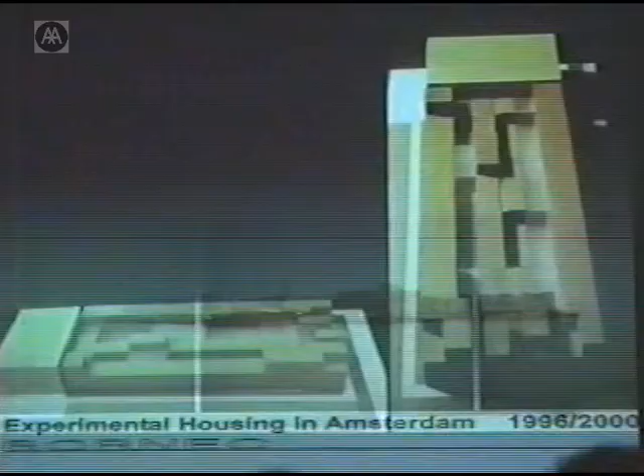Maybe you know, it's a kind of massive piece with holes, with certain rules, connections to it. This is a housing project with luxury housing, with halls, courts, private courts, and so on. It established a kind of strategy of limits, like making a border, a north, a connection moment, an ending moment, and a center. So it's a piece that I wanted to have a certain unity, formal unity, in relationship to having a starting, an ending, and a center also, and not just a kind of addition of parts.

All the houses have the landscape repeating into the roof, and the material is also connected to that - this kind of material that is between solid and lighter and light. The wood, for instance, was also decided in relationship to the ships, in some kind of contextual and even strategical decisions, because the client was a builder, a wood builder, a very good one.

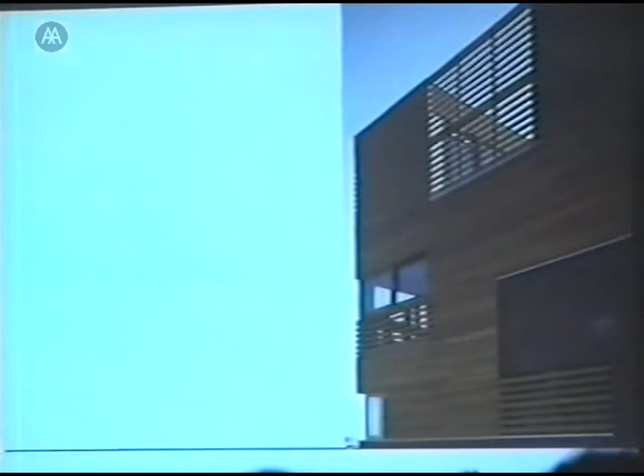And even the houses were also defined in this kind of dialogue in between light, air, and space. For instance, this is one house with connections to the outside, connected to the windows, with this kind of jalousies, this half open, half closed facade, a kind of winter garden, and also light coming from above.

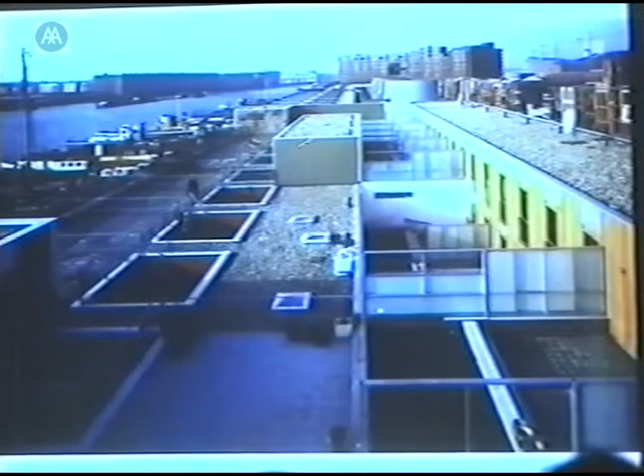Because at the end, the whole cover was like a village in a way. All the houses had a kind of garden, a green garden here. This is the north houses, glass garden. From here you have light underneath, and the whole area is transformed into a kind of domestic landscape when you arrive onto the roof.

So it's a kind of metaphor, this connection to the landscape and to the cosmic forces, that also acts as a practical fact for the inhabitants of the different houses, who have a lot of private outside space. Another house is also dramatically dealing with the cosmic forces of the landscape.

This is in a place with a lot of wind, dramatic hurricanes from the north, and very warm in the summertime. In the end it has not been built, even though it's in Mallorca, because of these reasons. It's in an open bay, so the weather is very intense and dramatic. The house is trying to deal with this kind of weather and natural, let's say cosmic, forces.

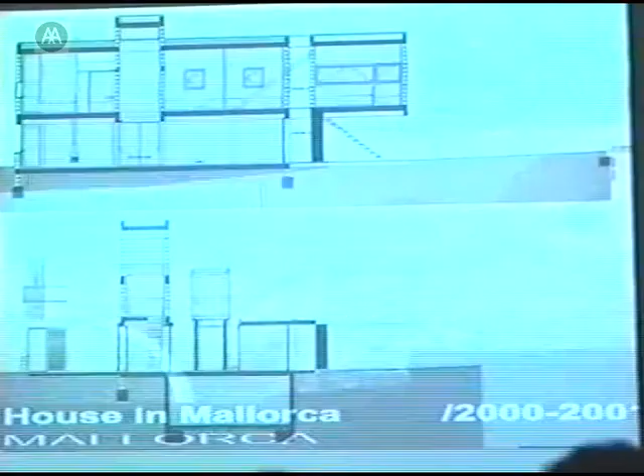The whole plan—there are some sections I'm not going to explain—but the whole idea of the house is, for instance, like a big wall protecting from the wind, from the north wind, in the rear a kind of small and calmer court. This is the section of the living room space, which has this kind of chimney section in order to have all the warm air arriving here, producing natural ventilation without any mechanical things.

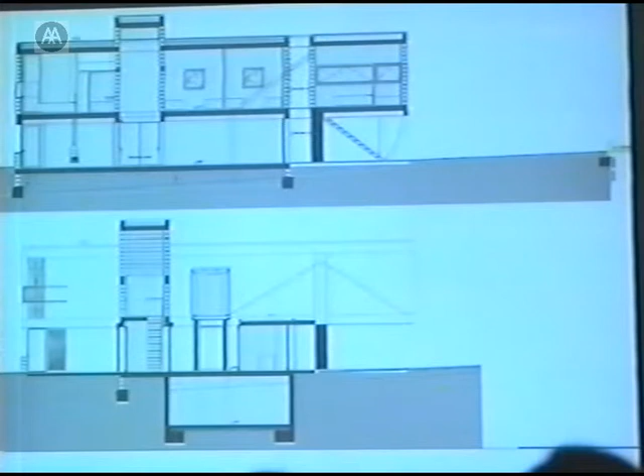This is a small court trying to avoid having direct sun into the house. This is a big cantilever, also for the same reason. So, wind and sun, but also some kind of formal presence, because it's a rocky mountain, the whole thing.

And the building is a kind of geometrical, crystalline form in relationship to this. This is the blue area—the big wall connected to the big wind protection. So it's a higher element protecting the rest of the house from the wind.

The whole area is this kind of rocky mountain with almost no vegetation, and the house is a kind of cubic, crystalline, geometrical, inorganic reading of this geological presence, with some detailing that's domestic and very African, North African, in terms of connecting and having the possibility of light inside.

But the house is also, at the end, using this kind of landscape as a spectacle, because it's a domestic house, a kind of weekend house. So you are there, and the living area is absolutely transparent, like here. This is the south area, and the north on the other side, and the house moves from north to south in a fluent way, like here.

So this is a small court protected by the wall, and also open to the north side, the windy and sea side.

Some stupid things like we are doing now. This is another kind—this is our old object. This is a very new one, something produced last week or something like that.

We are designing furniture, we are designing for a bank in Spain. This is the fourth Spanish bank, the Banco de Sabadell, and we are designing furniture pieces connected to the bank, special things, funny things, special for special purposes. This is a table with wheels for the public areas, where people are arriving, and big chairs that we are also designing.

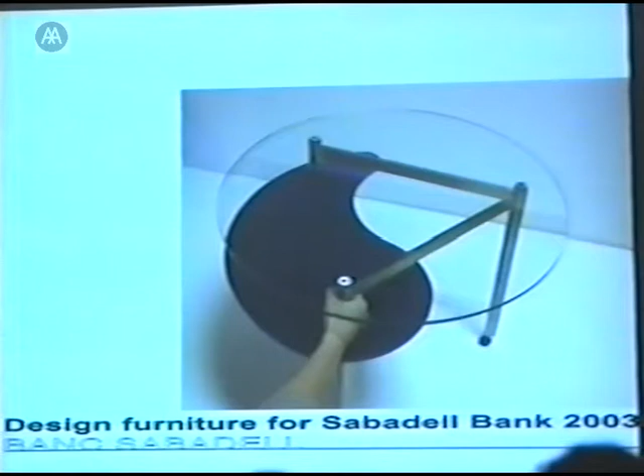And we are designing this kind of allegory between the yin and yang Chinese principle, the two levels—maybe it's easier to see. This is the yin and yang thing, and this also deals with the name of the bank, which is S, S of the Sabadell, the letter S, and it's also a kind of joke in relation to the entrance.

There's a kind of more festive and ironic presence object, among many others we are designing with other kinds of roles.

This is going to be just a project into this kind of series. Even this is only the design—already designed but no construction yet. It's starting the construction process, but not much yet. This is a project in Portugal, and now it's starting construction, but I'm going to explain it just as a project.

This is a project dealing with the topography of the site. We have to design the center, the urban space of the center of the town. The town is Castelo Branco, Portugal, nearby the border with Spain.

We designed the square, and also a small building with an auditorium for Maria João Pires. She's a fantastic piano player—I think the best Bach pianist now—and she's from this town. She has a house here, a foundation, and this building is going to be a kind of auditorium for the foundation, where she's going to play.

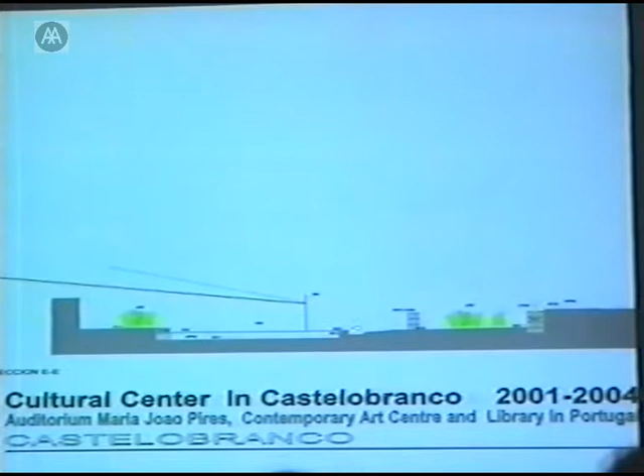The barracks are now out of use, and next to them my building for Maria João Pires is appearing. So it's a kind of transition—square, something in between, and forest.

This is the starting moment of this heavy action, the brutality of the architectural technique. This is the town, the limits, and the machines organizing the fantastic granite rocks. The whole thing is granite, like everywhere in Portugal, like this stone here.

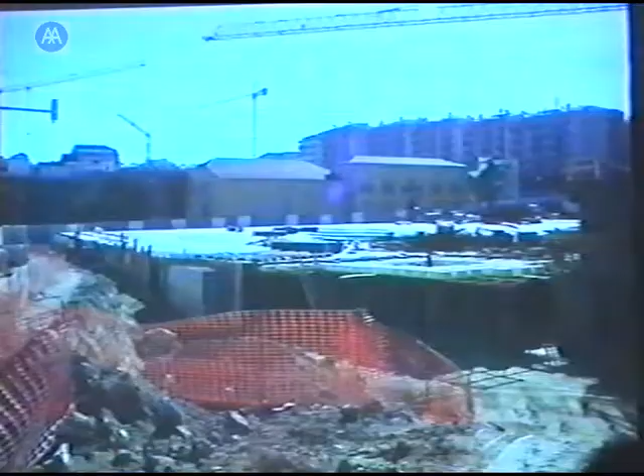This is a bit of the surface of the square. These are the barracks from the army. This is the place for the auditorium and the small museum—it's going to be here. The building, the project, is something like that.

It's absolutely elemental—just building the topography on one side, dealing with very primitive and simple facts. For instance, the way you put all the rainwater out of the square—the whole water of the whole topography goes to this one point.

Here a lake is going to appear. This lake will be bigger or smaller depending on the rain season. It's paved in a nice Portuguese way, with small pieces of granite in different colors.

This is going to be basically a green area, a green band here. And here there are some small elements—a restaurant, a tourist office, and a big canopy connected to the restaurant and some exits from the parking.

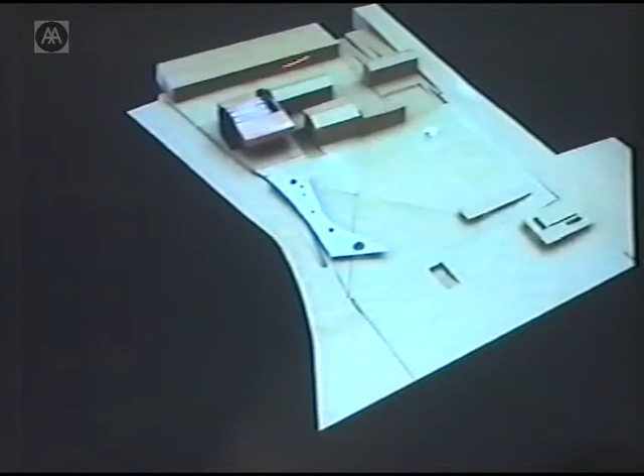It's a kind of, in my opinion, elementary but detailed urban space. Here the new building finishes the others, dealing with the ending and with the continuity of this space towards the other one, which is going to be the big forest—this part paved, that part natural, and in between our building is here.

So the building—this is some of the primitive ideas of the thing. This is the lake, the green band, and the primitive version of the building, which has no contact with the earth—just a continuity, showing the connection from one side to the other.

This is shown in a bit more detail, using these Portuguese materials in this drawing. The drawing shows the movements through the square, the normal flow through the space, marked by differences of color.

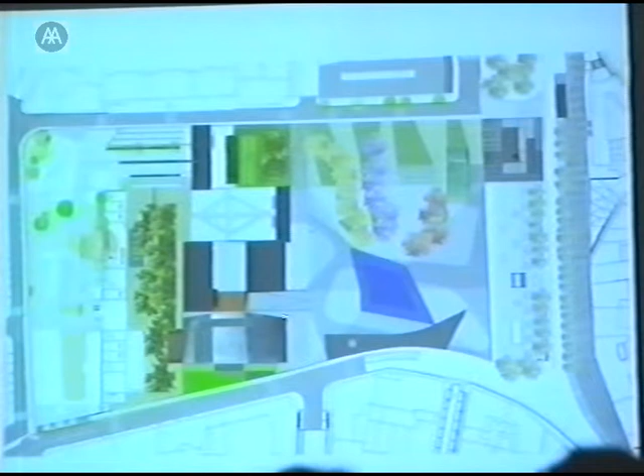The green, the lake, the canopy, and this building dealing on this side with the form of the space between the two blocks, creating a kind of reaction there. The whole building has a very small section, but I really like it because it creates a continuity of space.

So you have services underground. Here there is going to be a kind of patinoire - how do you say patinoire in English? This kind of... a skating area, it's a cold place, a very cold place. So it's a skating area here.

So this is the big facilities of the museum and the collective spaces. And here, to this plan, you have this kind of ramp and element like that - that's a small museum connected to the Contemporary Art Museum in Lisbon. It's a kind of showroom from this museum. And here is the small auditorium for Maria João Pires.

So the whole thing is a kind of continuity from here until there, as a space, and also as a roof. So the roof is continuing as a facade and continuing as a ceiling here. So it's a kind of continuous band of outside and inside, but also in terms of space. So some structural problems and dramas.

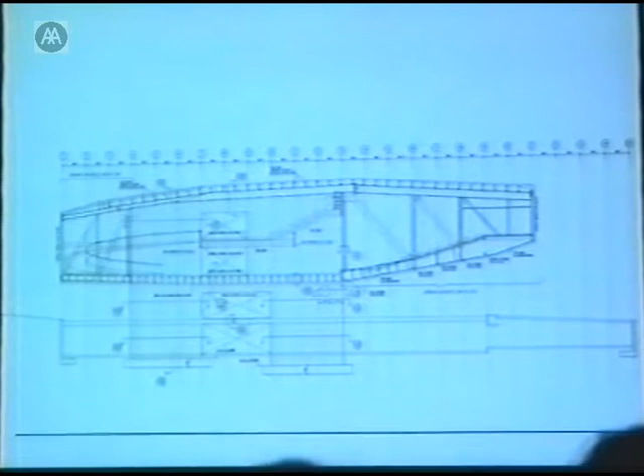So it's a big... so you see the plan. This is the ground floor, the minus one. So when you arrive from the square going down, it's a big, regular and clear plan, free span and flexible space with some holes in order to have light. This is the level of the street.

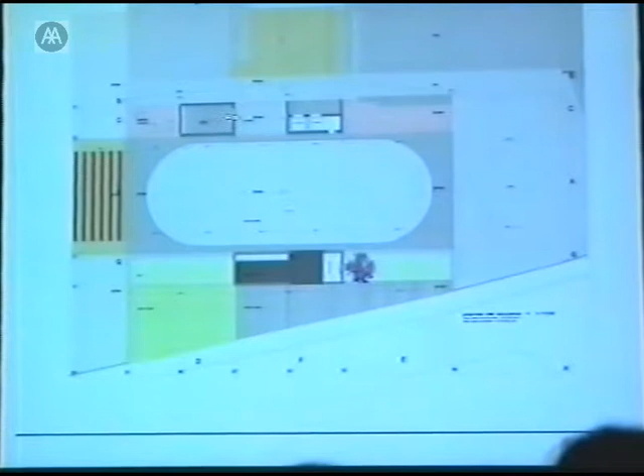This is the level of the patinoire, the skating area, with the vertical axis, the concrete staircase, the elevators and service elevators and so on. This is the floor with the ramp going up and the bottom of the auditorium. At the end, you arrive here - this is the foyer, you enter here, you went down.

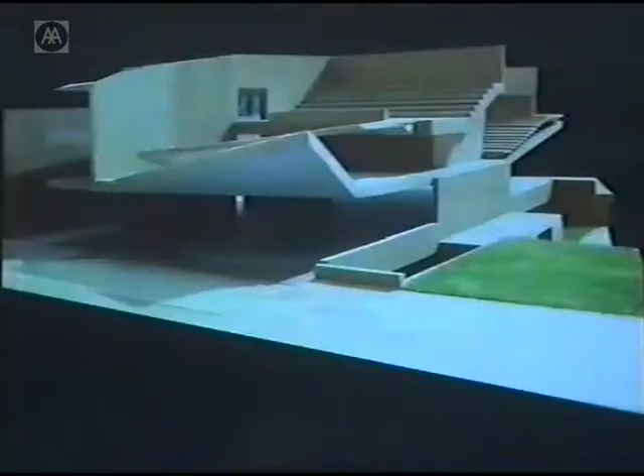So the whole thing is just moving. It's a project where the whole thing was moving - the floors, the ceilings, the roofs, and even the facades. And doing that, they organize the space like here. So this is a movement of the floor in relationship, a reaction to the ramp's presence. This is a kind of possibility.

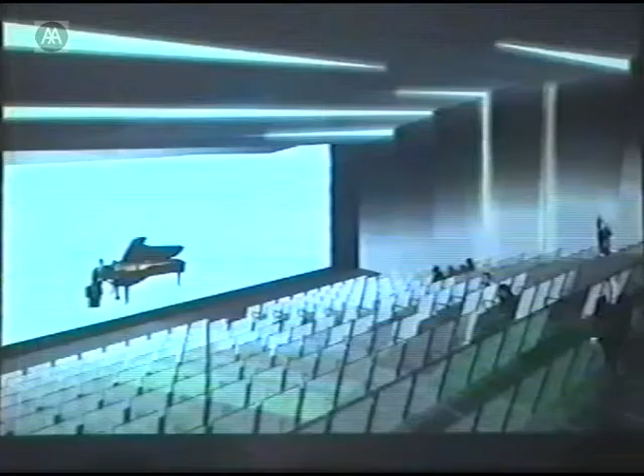The inside of the Maria João Pires auditorium. Maria João is very small, a very small woman, always dressed in black, and it's a very small auditorium - just for a piano and 3 or 4 more people. The whole thing is a very black scene, a black theater, but the scene is white.

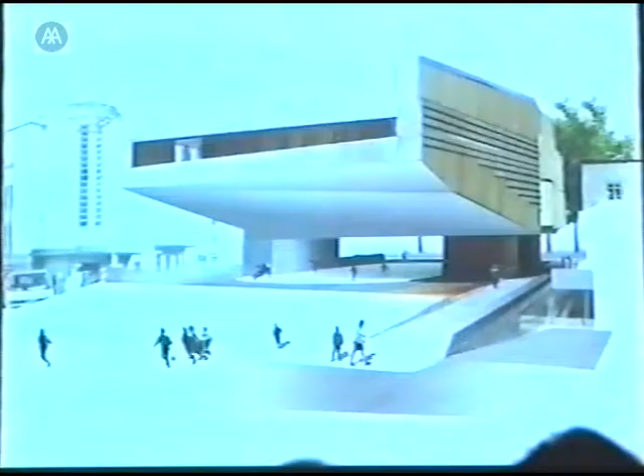So Maria João and the piano are going to be like floating, like in the film The Matrix, for instance - floating in between the space, changing absolutely the scale of the pianist. So this is the outside coming from the square, crossing the skating area. This is the entrance down, and this is the foyer entering the auditorium. The whole thing is empty, so you can even feel the forest that is going to be on the other side in the second band.

So children - these are nice. The children of the schools of Castelo Branco, last year they made a kind of event defining the project, and they made drawings, very nice, and even models. This is a kind of drawing made by the children in the town.

This is another project. We are close - we are coming into the world of construction but we are still keeping in the conceptual area. This is a very old project. We started, I think, maybe I explained last time when I came here - I mean 7 or 8 years ago. We won the competition at this moment, and we are going to finish now. So this is one of the things we are finishing now.

This is a bank, a Bundesbank building - a central government bank, in Chemnitz, which was the older center in the old DDR, in East Germany.

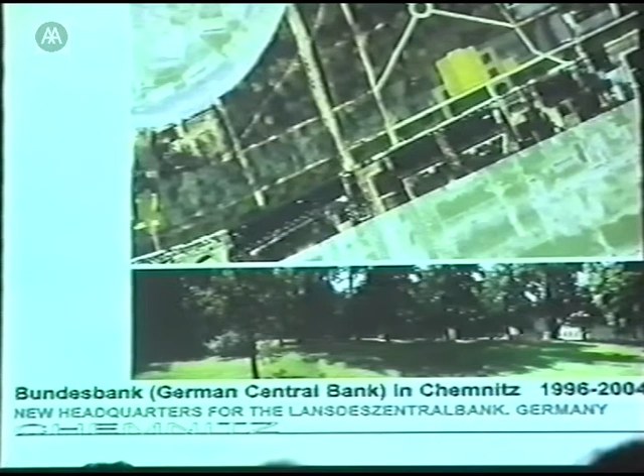The most fundamental thing to me was thinking in the forest, in a way, building something into the forest, the landscape and the forest, the trees as a reference point, not the culture. At the end, if you look at these historical references, these are like mountains in a way. The head of Karl Marx is an enormous bronze mountain in a way. You look at it with a certain abstraction.

In fact, there is a big paleontological museum that explains this transformation from trees into stones. This is the museum near the head of Karl Marx, and this is the outside, the front of the museum, with these trees but stones. These are paleontological pieces, because the whole area is connected by rich underground resources like petrol and chalk and all these things. So it's a kind of forest made in stone.

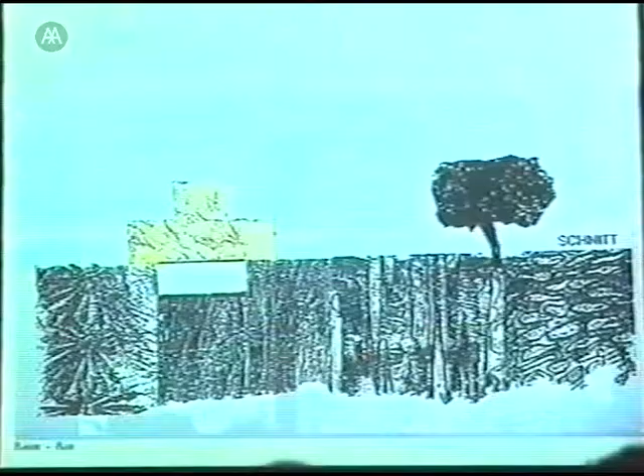This is what I wanted to do. It was a kind of ironical but not ironical, pragmatical and political decision, trying to introduce this reference in between the trees, with roots and these three levels of the trees, and also to connect with the bank problem, a big treasure that is changing from one side to the other in between the trees. The whole argument of the project is connected to this shape.

And also connected to this idea of using materials. In a way, it has been absolutely strong and difficult to deal with in such a long distance.

For instance, the shape was also very interesting in terms of structure. So, for instance, this higher moment is connected to the two vertical nucleus—I cannot explain the plan for security reasons. Security is something in Germany, it's a kind of limit of the paranoical things.

So it's a kind of two vertical elements. That means the whole building has to be very rigid, very protective, very closed, very stone, absolutely no windows. In a certain way, it's like a prison, like a prison of the money.

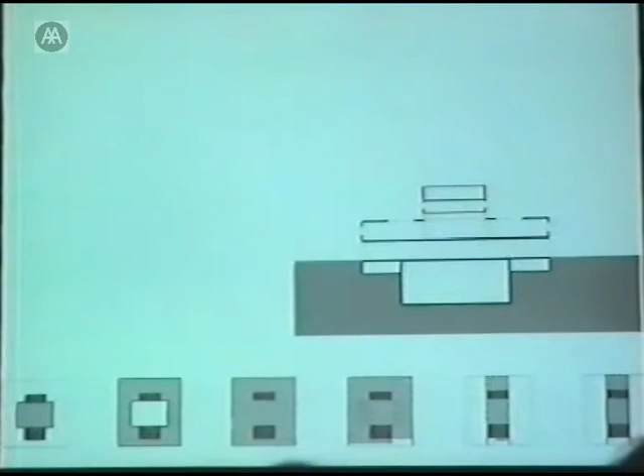And the building was something like a mass of stone with translucent pieces, with translucent, like massivity, like a bar of ice on the other hand, because it's in between strong and solid, but at the end it becomes connected to fire and to the liquid and to fire also. So the whole thing is something like that, with stone.

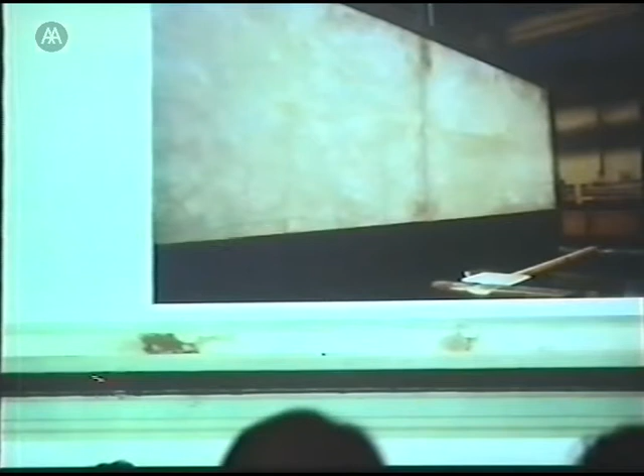This took many years to define, this kind of translucent material. This is a kind of composite—we had to force through a patent, a new patent, for this composite element, a new element with alabaster in between. So it's an enormous alabaster piece.

Alabaster is a material that is in between translucent and transparent and solid—translucent, but also stone. It was used in medieval times and so on. So it's a composite element using alabaster as the main nucleus, like this one. This is in the laboratory for testing. So this is the whole thing.

A little bit later—so the whole facade in these translucent pieces is like snow, in a way. The facade, the stone, is transformed into a kind of frozen area, a frozen piece, something like that. This is very ugly.

These elements, all the stones, are absolutely local ones. It was a conscious play on game, being absolutely local, absolutely heavy, absolutely connected to this landscape, this paleontological thing. So, for instance, this is a Saxon stone.

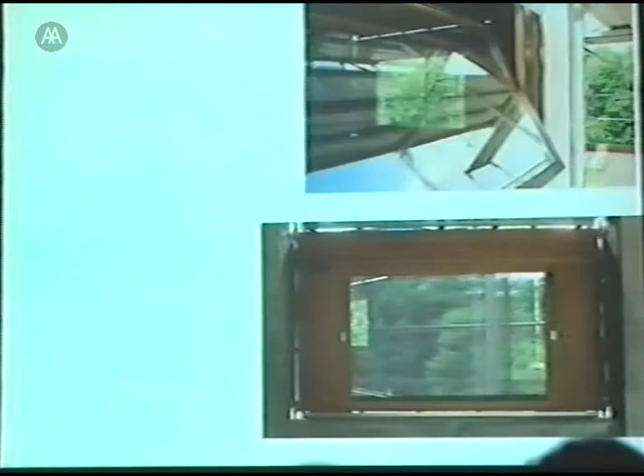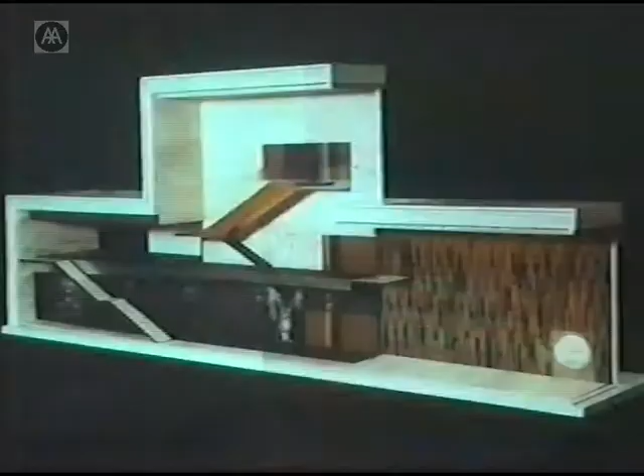The windows are a mixture of wood and bronze, so it's always having some kind of natural elements, like this one. These are fantastic ones. And at the entrance, the whole space is...

Using all this argument—I hope it hasn't been a caricature—the argument of this kind of inorganic and organic connection. These are also pieces with some kind of stones into it. This is a very strange wall made in wood.

We are going to explain. This is an enormous art piece that is also made in a very craftsmanship system. After working so long, the whole project has to use a kind of craftsmanship, a crazy nightmare in a way.

This is an enormous art piece that is going to be painted by one of the biggest Czech painters. He's going to be painting for like half a year. Because it's so big, he's not going to use a picture or a photograph, but he's just painting and painting like in medieval times.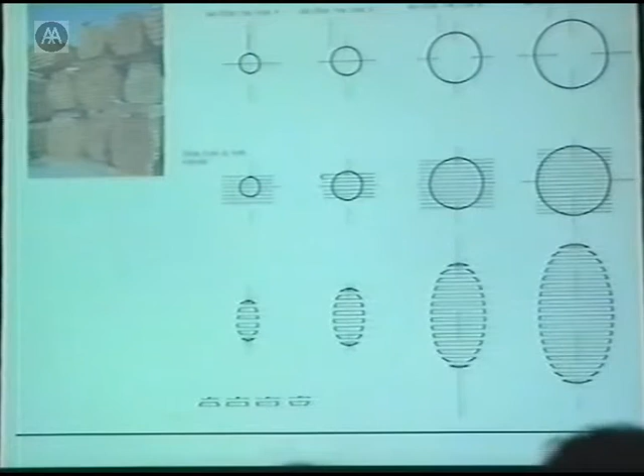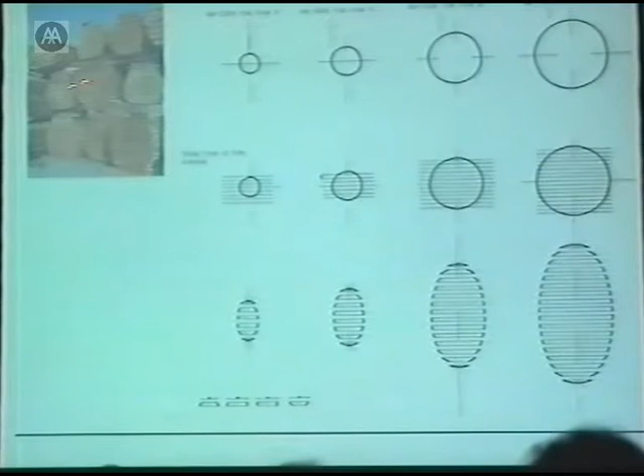In a way, this is the same way we use the wood in this kind of big space in between. We use the wood, taking the trees as references. For instance, these are the trees—you cut the trees here, so you cut the trees here, and you have some transformation of organic things into geometrical surfaces.

From that, we put the trees like if they were animals on the walls—this kind of head of the animals, I guess. So you put the trees one after the other, and this kind of surface is going to be just decorated, and also for acoustic reasons.

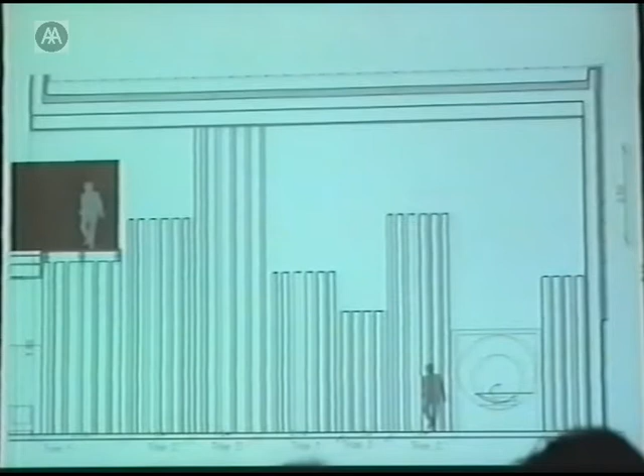But this kind of wooden... remains, so the result is going to be something like that. There are different possibilities of trees doing that. At the end, we put one tree after the other, changing the character, because normally in modern times this kind of wood panel is absolutely artificial. In this way, we are going to have really direct trees there.

So continuing this metaphor all the time, continuing this metaphor in between organicity and inorganicity.

In this moment, I'm going to start this convention center complex. I have to say this project has been built—it's going to be finished in 4 months. We started 2 years and a half ago, and we have been involved in this kind of crazy process of being designing and building all together in a way.

We started with no idea on the facades, for instance. We started with the foundation plans, with no idea on facades, and so on. This is a huge project, one of the biggest in Spain—for instance, it's a big hotel, 450 bedrooms, not very big, but quite big for the scale of the office tower.

The convention center is 85,000 square meters and so on. Several questions connected—one is the way we do it, the fast track way of doing. I'm going to explain this later.

Some other questions—again, a situation in between sea and land. So we are confronted to this kind of natural landscape. This is the border in between the city and the sea.

Second question, the city. Several interesting questions connected to the urban position of the whole piece. This is the diagonal—maybe somebody of you knows Barcelona—a very important street crossing the whole city. This is the Cerdà grid, now a little bit restored, and this is the end of the diagonal arriving to the sea.

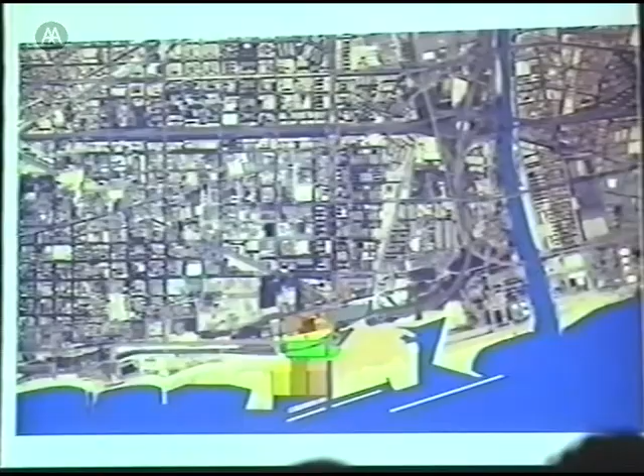So we have all this kind of different urban traces—a previous trace from the 19th century, a 50s housing district, 80s motorways, and so on, and the sea, of course, all the time there, and the city. Another question is the program.

The program—this convention center is one of the ugliest and dramatically terrible buildings in all the world. So I had to visit. I had the opportunity—I have to say the opportunity—to visit many of them.

Unfortunately, I have to say that this is the building when globalization ended in a kind of non-architectural nightmare. It's a kind of place with no place, really, with no consistency—flexibility such that events could even be in the -20 underground, because organizers like being underground, since there are no outside conditions, and it's homogeneous all the time. So you go directly from the airport to these places, and you could be here or in Barcelona or somewhere else.

This is one of the most dramatic examples of globalization turning into bad architectural products, because these buildings have no tectonic consistency by definition—they wish to be just flexible, so nothing stands there. They can host 2,000 people one day, a big dinner another day, and a film shooting area the next. But at the end, these kinds of areas have more interest than convention centers, which wanted to be a little domestic and nice, so they are not so industrial.

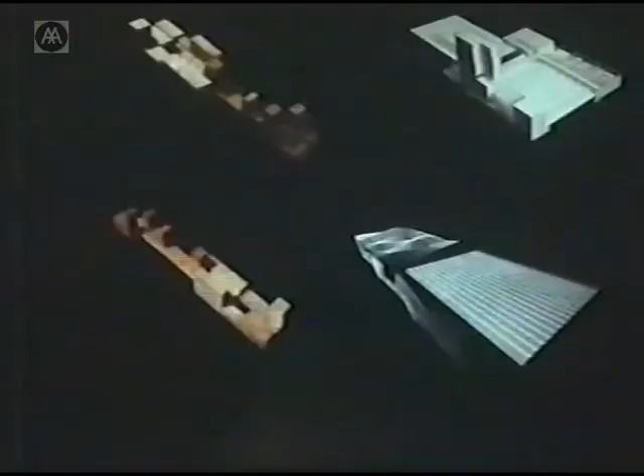So there were some first things connected to that—some geometry like a magmatic presence coming from the earth, from these first things happening, also thinking about having skins that could connect to the inorganic quality of the polygonal, geometrical part, while something else connects more to the organic, the beach.

This is something we stop here and continue later with this argument. In other terms, such a heavy thing has to be, in our contemporary times, pragmatically very radical. So this connects to this diagram, which organizes the whole thing and explains the way we proposed and have built—are building—this project.

We divided the area into three bands. One is connected to the city—this is the area with the skyscrapers, the office tower, and where the hotel is going to be.

This is clearly the part more connected to the city. This is the more inorganic, artificial part. So this is A.

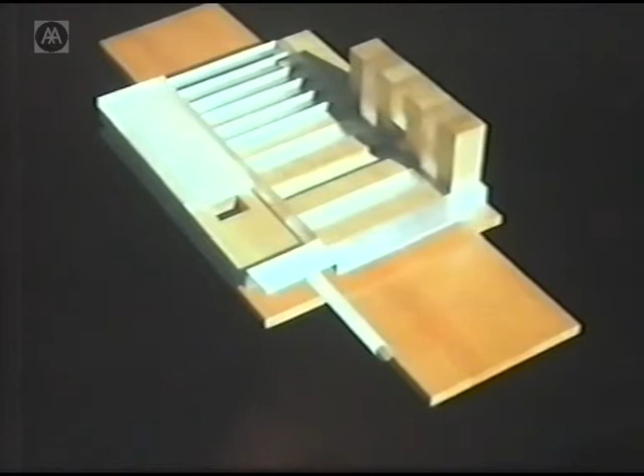Such a primitive and strict, maybe clear diagram is the center of the composition of the whole thing. In parallel to that, we built a kind of phantom model. It's not a model; it's just a kind of strategical model in order to connect this strategical principle of use of the land in terms of form and scale.

So this was this kind of band connected to the city. This is the big square, the big space, with the models explaining the wish of continuity on both sides. And this is the facilities with several distinctions in texture and form, thinking that there were a lot of things there, and it was not going to be so easy to put into one single form.

Here you see the beams, because we wanted, and they wanted also, to make a space without columns, a big space without columns. So the beams appear as a kind of architectural volumetrical question.

This is connected to a big urbanistical park with Acebillo. Mr. Acebillo, as Mohsen has explained, the architect, chief architect of the city, has been involved. This is the Herzog and de Meuron piece. This is Alejandro Zaera Polo. This is a beach area, so it's big. I'm not going to explain. This is a big continuity of outside spaces like beaches, park, recreation area, covering a kind of industrial activities - they are there, industrial facilities, that's here. But my building is connected to the city and also open to the big park and after to the sea, because the motorway is underground here, so there's a kind of continuity.

So you see a little bit more the developments of that, and here appear the developments of this principle of the three bands. And here starts to appear something that has been a tool also to design - using the structural plan as a tool for designing, as a strategy for designing.

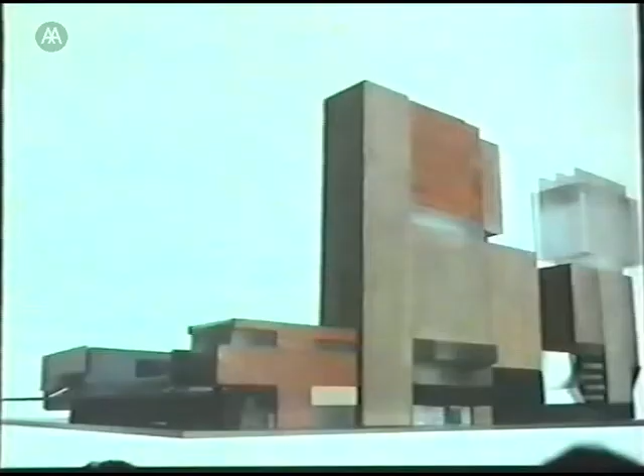So for instance, this is the band of the city area with a hotel until here, and this is the public areas of the hotel. This is one of the biggest. The whole thing is very high for the Barcelona standards. So this is the big one with the rooms and so on, and this is the office building here.

The volumetry is dealing with the fact that they are making like a wall, but I did refuse to make a wall, so having the opportunity, the possibility, of having light from one side to the other. The structure has been a fundamental tool for dealing with this. They are for private clients, two different ones. And the plans are into this band of the 20 meters, urban band, with a hotel here, the office tower. Next to the convention center is a continuity of services here.

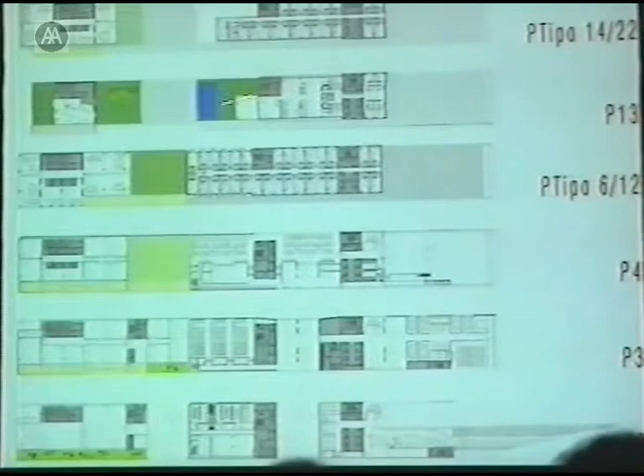And there is a floor with the whole thing changed and a new landscape appears. This is going to appear a little bit later, I'm going to explain a little bit later. The hotel is like a wall with holes, using the same stone but with different finishing. So it's like a really heavy piece.

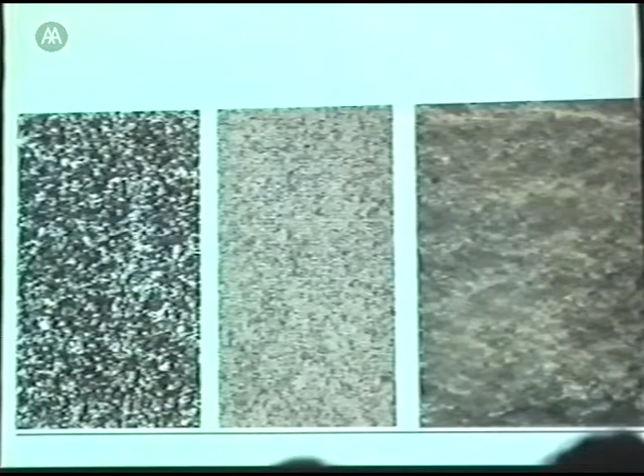This kind of inorganic argument at the end here was the most evident occasion of dealing with that. So this is the hotel with different finishing of the same stone, dealing with the light in different ways. So you see, this is the hotel.

But I wanted to say that the whole thing, a key question, is cutting the buildings into the middle, more or less, and arranging a kind of landscape very high. So into this intermediate level, the building changes profile, and even the structure is changing, because the whole thing here again is supported at the top.

So this is, for instance, the big pillars, the big beams, and they are hanging here, and here we have no pillars again. And this is also happening in the hotel, so it's a kind of cutting into two.

This was a very... so for instance here, this is provisory. Now they are really taking out this kind of portion here, and the whole area is going to be a big garden with a big swimming pool into floor 14 or 15. So this is this area.

The other is the office building. This is the center, the nucleus with concrete, arriving until the top. And here again is going to happen the same. It's a kind of changing of level that is also dealing, in my opinion, very well with the difference of visions of these two buildings, but they are going to be seen very far away from the city.

In this case, we are just going to see this kind of upper portions, some visions. This is inside. The inside are like clinical things in a very sophisticated way. And these are the structural plans from the office building.

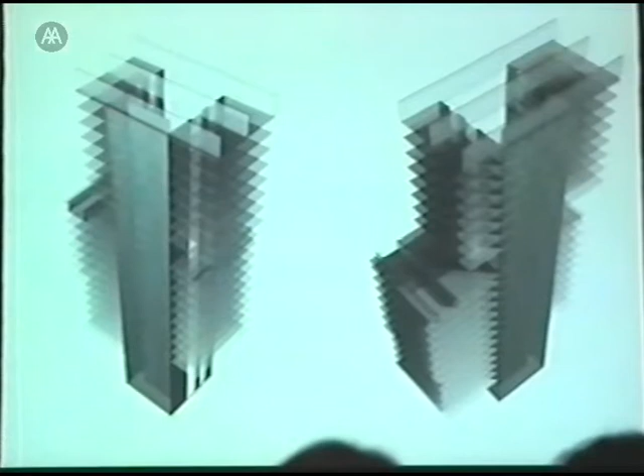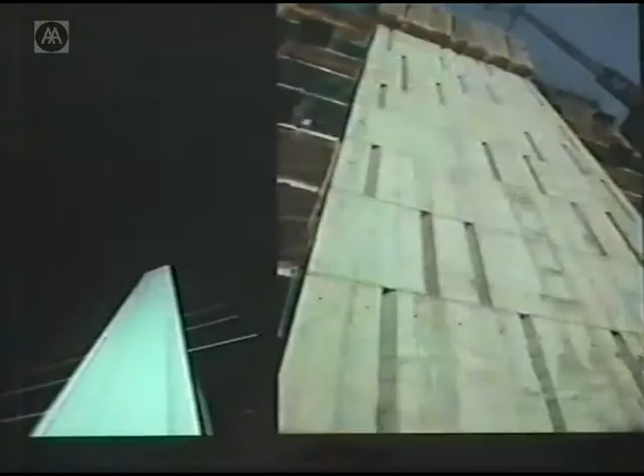This is more, let's say, a model from... This is concrete, this is two layers of glass. So it's going to be really like a bulb, a light bulb, and this is the concrete element with all these kinds of small windows in order to have light inside.

We are working with the artist Sylvia Herning for defining the colors at night from this kind of elements, like windows. These are going to be visible from the diagonal, from the whole city.

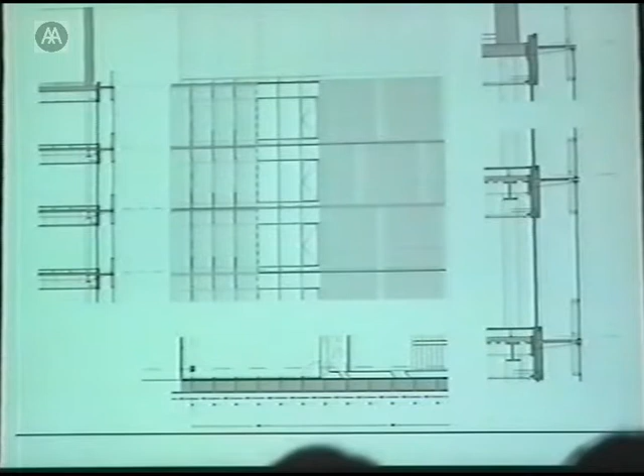The two layers of glass from the upper part. In this way, the whole thing is going to be very abstract with no windows. The windows are going to be inside, and the second skin is going to act as a protection against the sun and against the wind also, having this kind of movement of the air in between. So you open here, but the other layer is a very abstract one, a little bit white also. It's going to be like a big lamp at night.

So this is this area. The second element is the big hall. This big hall is this kind of square crossing, going from one side to the other, with the big beams. The big beams are used also for having light inside and having all the ducts, the ventilation, and all the services. It's a very refined and very complex problem that I'm not going to explain, but it's very exciting also, how to connect all these things.

In this it's like also like in the anatomy - I mean, in the bones there is a lot of things going into the bones. So it's happening like that too. In the big beams, a lot of things are happening inside, and one thing that's happening is having the opportunity of having light in the space.

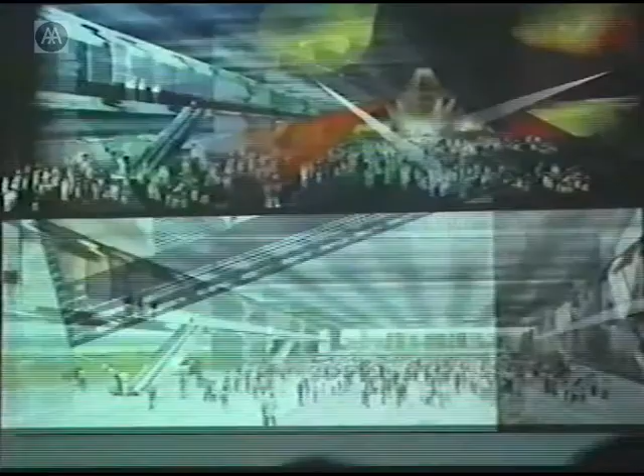So this is one part of the space, another part of the space with big rooms there and a big garden, I'm going to see later. The space is this kind of flexible thing.

The radical reversion was opening everything. So it was changing the condition of the underground minus 20 to a ground floor absolutely open in a way, with natural light and open to the landscape, and of course with the possibility of being closed, but also with the possibility of being open. This is a space with 15,000 square meters, with possibility of having 15,000 people there, so it's an enormous thing.

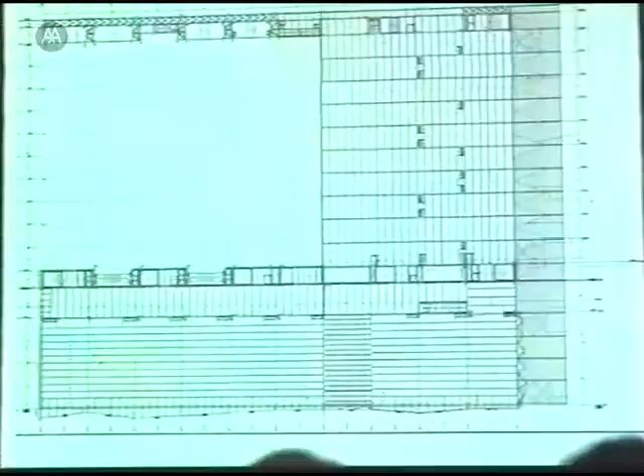This is another version of the structure as a tool. I'm not going to develop that, but believe me that the structure, I mean the engineering of the structure, could be a key question for defining such crazy things, so for surviving into such a crazy situation.

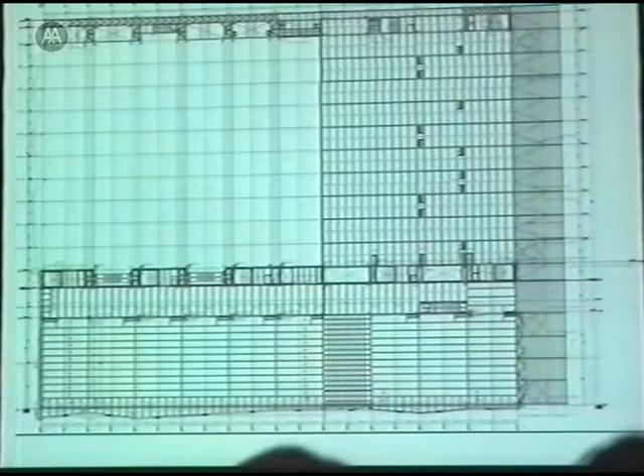So this is, for instance, the big pillars connected to the big beams, and all of them are connected to the static, to the installations and so on. And this is a kind of very clear, and I love this - we have been working a lot on that. This kind of clarity even has the condition of building such quickly.

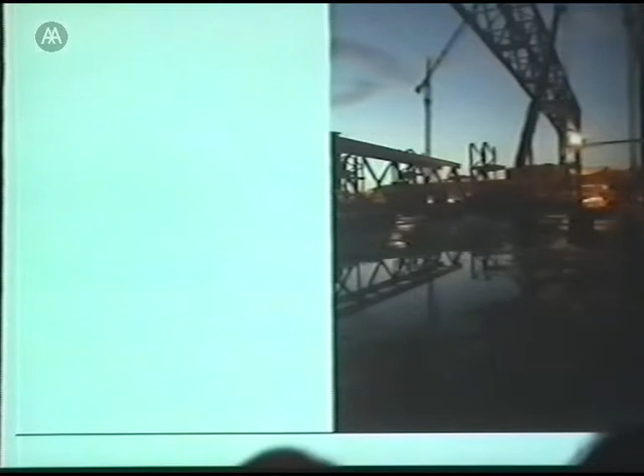More plans, more events connected to the structure in a way. I also, because at the end architecture is a kind of archaic activity in a way, being able to deal with this beam was a kind of big party for everybody involved. It's 90 meters of beam, made with three different factories put together, and after putting up, it was like a big event. So these kind of archaic things are in a way also connected to our job, this dealing with gravity force and winning against gravity.

Icarus was the first architect, was an architect also, this flying man.

And inside, the spaces are kind of huge, because it's a non-tectonical fact, because this is just a space, and everything matters - so the roof, for instance, is fundamental, I mean the ceiling, with this translucent ceiling having all the ducts and the light, the artificial light, and even the floor - the floor is like sand.

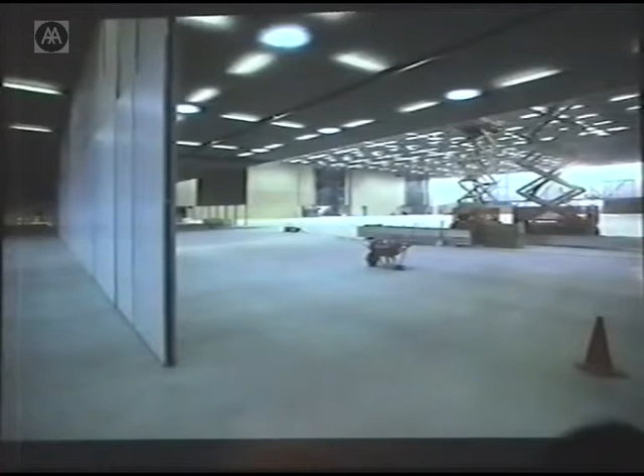So you see this is the presence of natural light in between. This is the artificial light, and this is the presence of different things into this kind of continuity. Of course, this is a space that is going to be defined and organized by enormous movable walls that are very impressive, also acoustically treated, and they're able to divide and transform the space into a smaller one.

So this is one of the sides, and at the end this big space is organized by the light and the conditions like acoustics. The acoustic has been studied a lot - we studied a lot of the acoustics of this big thing, and the mechanical installations like cold, warm, and light, artificial light, and so on.

But also the materials - the materials are just this false ceiling and the pavement. The pavement is like the beach, like sand in the beach. And the openings to the outside - this is the opening to the outside, you're going to see later. The roof is like a mineral landscape.

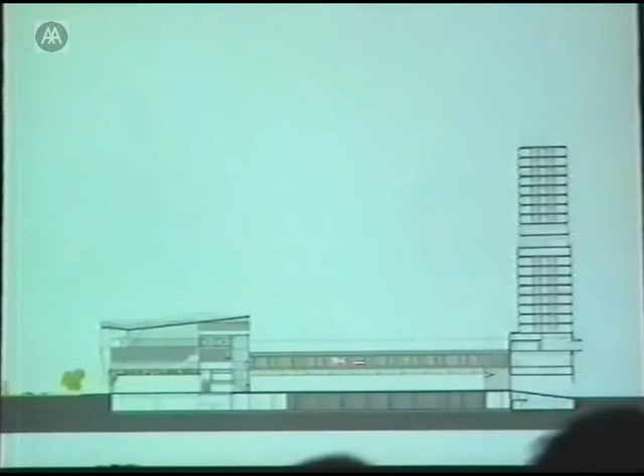So this was the big element, and after we are going to be confronted with the other services, with all the entrance and meeting rooms and so on. This is the three parts: the services, the big hall, and the towers.

Here the game is changing. The game of the whole project is changing because we were confronted, as I said at the beginning, not just with the inorganicity of the city, but with the organicity of the sea and the landscape. So the whole thing is taking another direction. In fact the structure is very clear.

Also it's 130 meters span for meeting and conference rooms and foyer, and a very complex small area with small facilities, having light in a special way from the rear part. So again, structurally, in a way it was very simple - it was 90 meters span, 10 and 30. So the whole thing, the span is the fundamental thing, the dimension you have to win, you have to cross.

But next to this kind of structure, the skins are playing another game, dealing with another kind of geometry, dealing with another kind of problems, dealing with this kind of organicity of the problem of the sites. For instance, the roof.

The roof is a kind of version of the Jaima, because the space is going to be, it's the only part that is going to be more organic at the top. It's a big restaurant, and the whole roof is a kind of Jaima, this kind of tense structure, but also has to be seen in relationship to the mountains, in parallel to the mountains, and in opposition or in dialogue to this industrial thing.

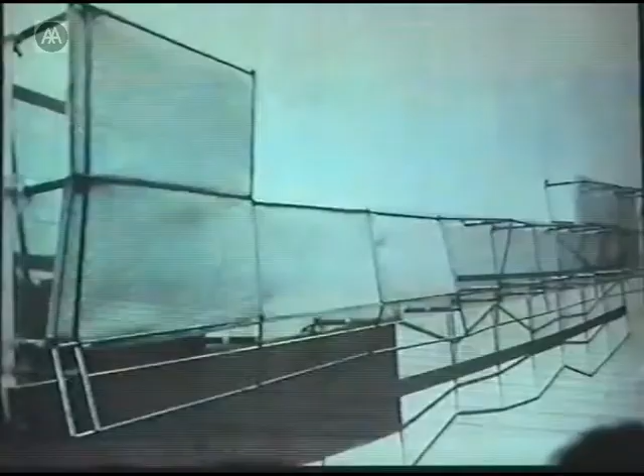The whole facade - we're developing some kind of strategies for making a kind of movable facade. We had to invent many tools. This was an enormous model, but you could change the geometry of these lines in order to define the figure.

Because the whole thing is made in kind of panels, it has to be industrialized for the time pressures, with new possibilities of industrialization - 1,000 panels, all of them different, and they can be industrialized using computer tools. The panels are aluminum panels with different finishings, different kinds of holes and incisions into them. This is a kind of panel, but on the other hand, they were very easy to handle and to put up.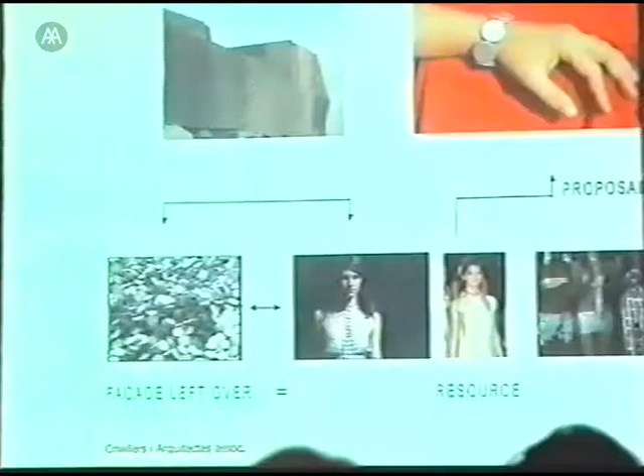No? So they were like an industrial thing put on the structure. Somebody bought all these pieces from the panels, because we made a lot of holes, small holes, and they made a kind of fashion - people made like Paco Rabanne's versions on fashion dresses. This is just for explaining a little bit the texture of the whole thing.

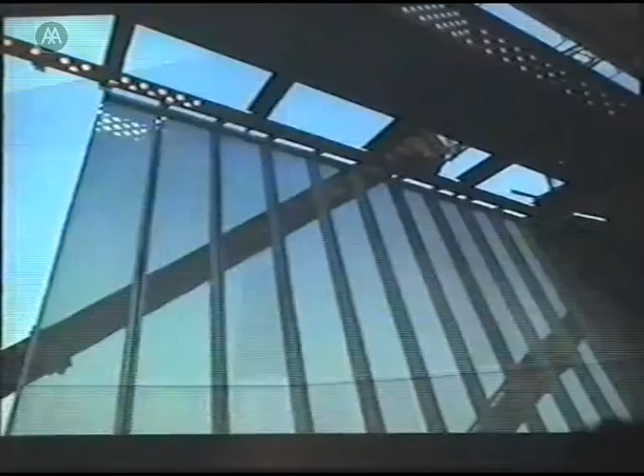So this is the west facade. We have seen the window, the space from the inside, with this kind of sun protection from that. And this is a kind of interesting small movement in relationship to the movement of the whole thing. The sea is there.

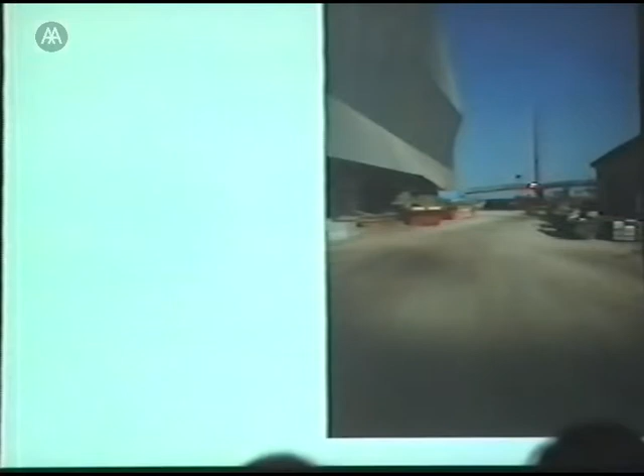This is the south facade with the big restaurant there, and you see the way of putting this - you put it there, and after, the whole thing appears as a continuous skin with different degrees of transparency or translucency.

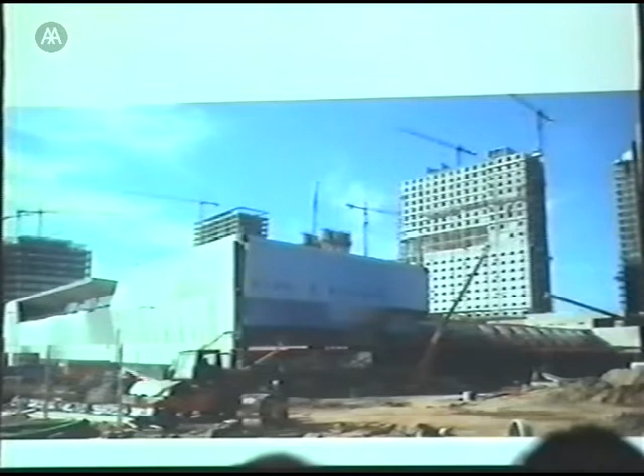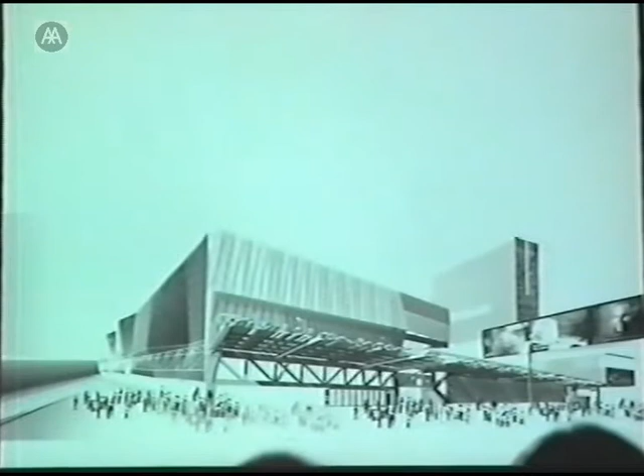The whole thing is changing. This is the south, next to the garden and next to the sea. This is changing towards the main entrance that faces the Herzog and de Meuron building. There, the building changes the language, and here what I'm trying to explain is basically the big structural fact.

So the whole thing is just - we explain the big beam and the big industrial and technical decisions, like in a ship or something like that. It's not decoration, it's not architectural decoration. It's just a structure that is going to be seen, and a big cantilever terrace.

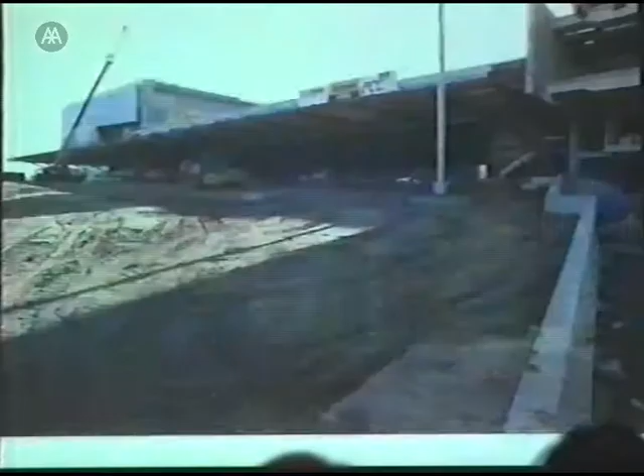That is going to be here, this one, this big cantilever terrace. This is the end of the big space, and you're going to see how we are going to close that. This is the hotel, this is the entrance. The structure of this big cantilever piece is hanging from above or from the rear.

So it had two series of pillars, let's say - one is coming from here, and after they go from above. And the finishing of these things is like broken materials, just so as not to compete with the structure, just dealing with the preeminence of the structure.

So for instance, this is the big platform of the big terrace on the first floor where the main conference rooms are. Of course, we proposed having an enormous outside space for the conference rooms, having the possibility of being outside. The climate, of course, is positive for that.

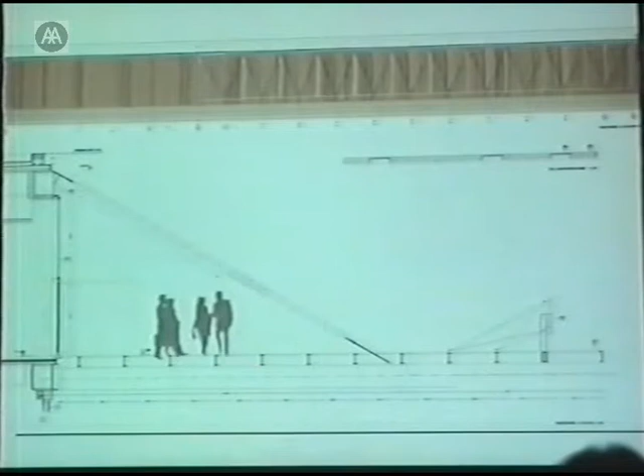And as I said, all the finishing here and there with the big facade are like broken elements. In this case, it's a kind of platform with wood and glass - again pieces of wood and glass, having this kind of possibility of the outside as a meeting point, and also adding some textile sun protections to formally increase this kind of perception.

The whole square is also combined with the big screen with LEDs in order to introduce some kind of tension between this more leisure area and a more informational platform.

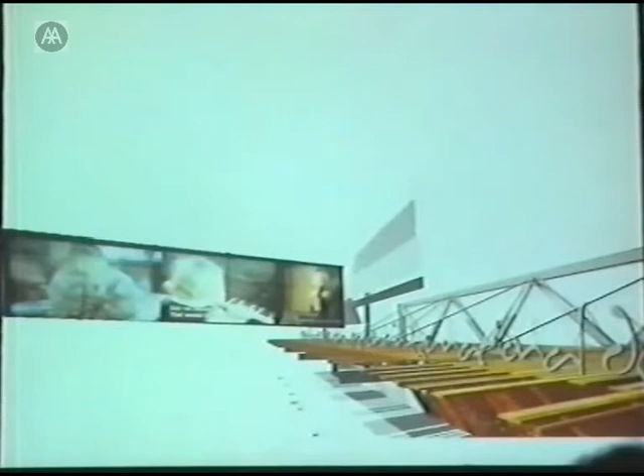This is the Herzog and de Meuron building in my version on the drawing, and this is again this kind of broken wooden element, the broken wooden platform. The title, the name of the building, is going to be in this kind of lettering, vaguely like Arabic. Basically it's like a continuous line, also acting as a fence.

From the terrace, this is the big screen - these are other branches of the screen. This is the platform as it is now. This is the platform and the entrance. You enter from above this big platform, and this is what you're confronted with.

This is a big movable door, closing and opening from the big hall, designed in Cor-Ten - this kind of corrugated, oxidized steel. But also using the same technique of eroding, destroying the unity of the pieces.

So, also thinking this place was where people were put in the 50s after the war before being killed, we defined this kind of points and relationship to these shocking facts. Inside, some inside elements.

So there are the big conference rooms on the first floor. You have to imagine here a kind of movable panel wall going into this wall, because they are acoustically treated and so on. This is at the end of this space.

This is a kind of special space where everything is going to be in booths. This is the lobby, and the whole building is cut in the middle with a kind of garden. In the lobby there's going to be an aerial garden in between two sheets of glass, and after it's going to be a regular garden.

So this is the garden here in between two sheets of glass and some light, and after here we are going to have a regular garden on the first floor. So this kind of coating, this is the kind of coating that is coating.

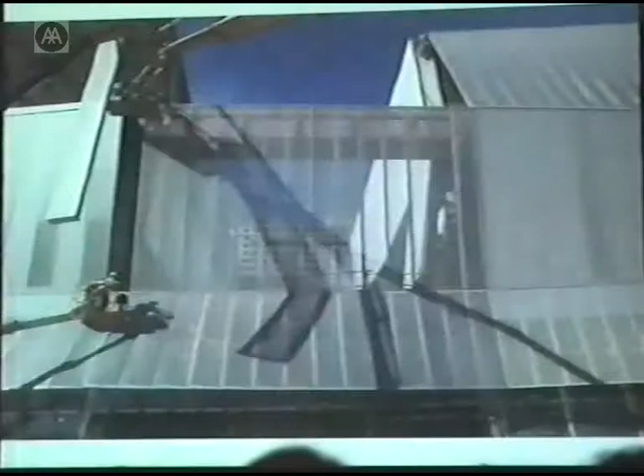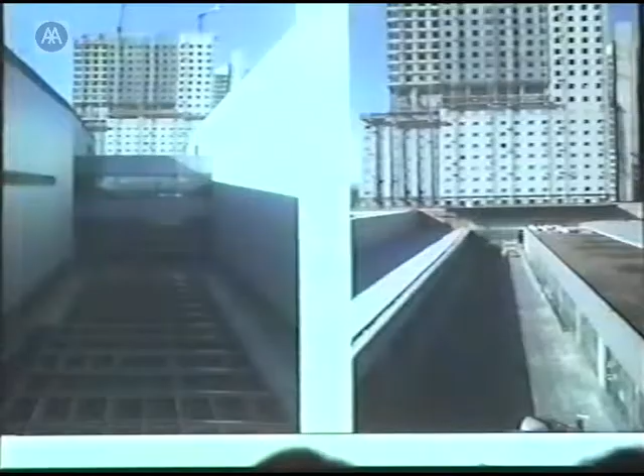This is another strategy for destroying the box in a way, it's just coating the box. This is another possibility for destroying the isolated and silent box. So you see this is the kind of garden, but a light element here from the lobby.

We cross, this is going to be everything with green elements, and after we continue with this piece which is going to be a garden, and after this is continuing towards the hotel, arriving at the other side. So it's a kind of incision in the whole project.

This is the big lobby. The big lobby is an enormous space, it's 4,000 square meters with nothing, and I was very worried about how to deal with it in terms of not tectonics, in terms of space.

We have this suspended garden, but I thought it was not enough. And we are working with the artist Cristina Iglesias, who I hope is here because she made an exhibition some months ago. I think she's here today.

She said to me yesterday she's doing a kind of artistic intervention that I found absolutely exciting in relationship to the logic of my project also. The problem is how to define a space with nothing, with no material, with no furniture, or worse, with horrible furniture that's going to appear in the near future. How to define architecturally a space without defining, let's say, the tectonics of the space.